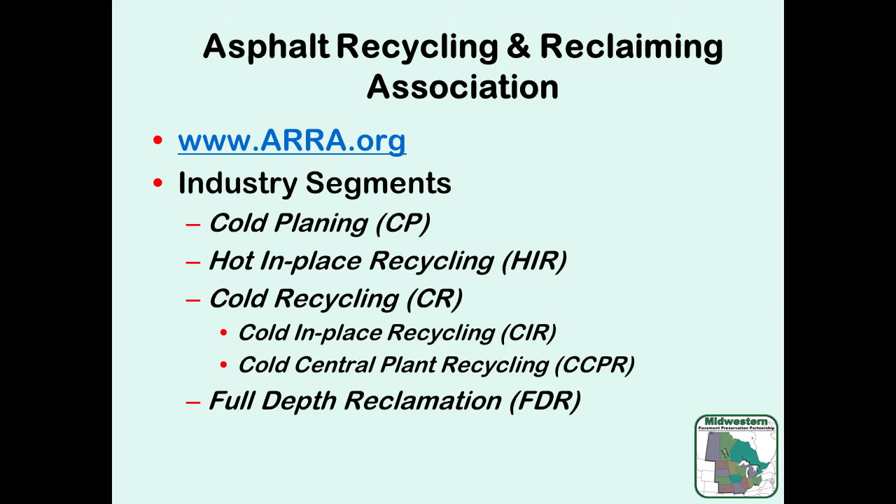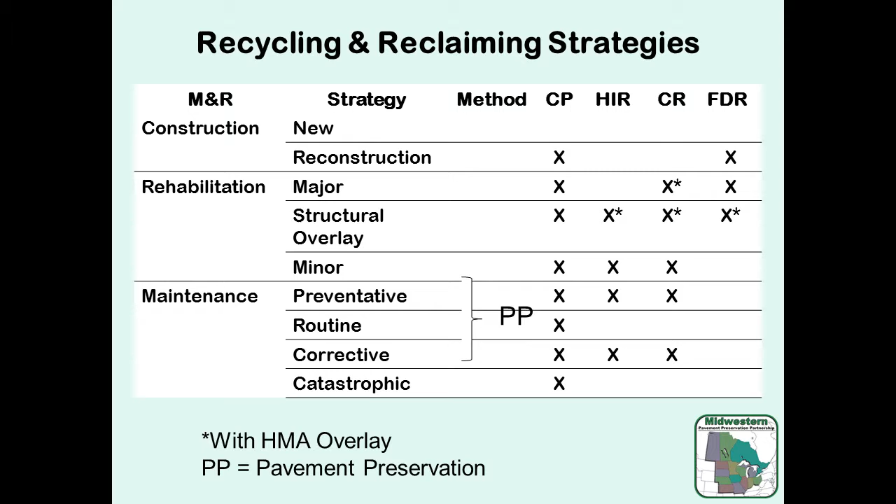So you might be wondering, why are we here? You don't think of these things in pavement preservation. Well, this is a chart we got from the Federal Highway Administration a few years ago. Pavement preservation falls into the maintenance categories of preventive, routine, and corrective. According to the feds, hot in-place recycling and cold recycling fall under preventive and corrective maintenance, so you can use your pavement preservation funds for these activities. But we can also add some structural overlays, make these things significantly stronger, and get into the structural overlay and major rehab. And then FDR obviously does not fall into pavement preservation.

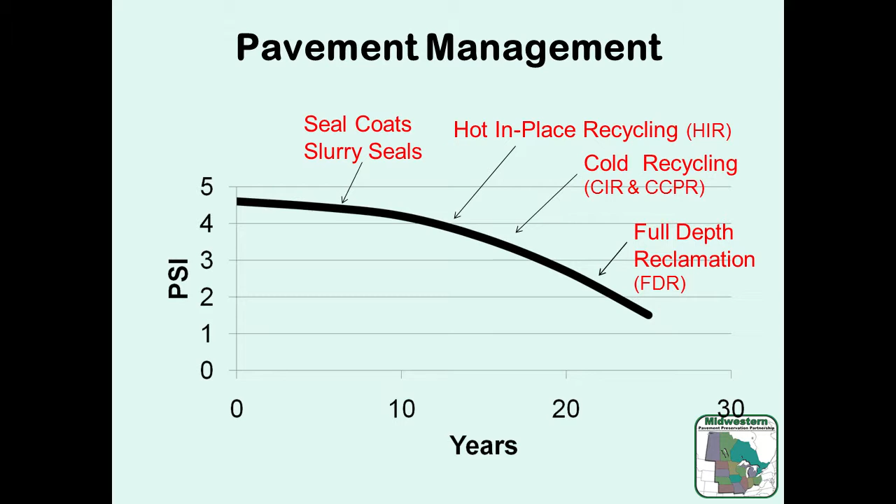So one of the things I got asked to talk about was curing. If we're talking about curing, I made the assumption that we're talking about cold in-place recycling. We usually don't have issues with curing with hot in-place recycling. When I'm working with cold in-place recycling, I have two different recycling agents I can use: foam or expanded asphalt, or emulsified asphalts. And really curing, to simplify it, is getting the water completely out of the system. It's a little more complex than that, but that's a start.

So how does this water get in there? Well, you have to put water on your cutting teeth, and typically that's anywhere from 2 to 2.5% moisture. There are some new cutting tools out there that can knock that water down to 0.5 to 1%, but they're not widely used yet. So it's the same for both. It takes a little bit of water to foam the asphalt, but that's a very small amount, not really all that significant. But there is water in the emulsified asphalt. It might be 1% by weight of the RAP from the water in the emulsion.

With foam, you do usually end up adding a little bit of water for compaction. In fact, a lot of times you run a modified Proctor to figure out the optimum content and make sure you have enough water in there for compaction. For an emulsified asphalt, we might add a little extra water to help disperse the emulsion, but we're not going to add water for compaction because usually we have plenty of water in there. So then there's also water in the pavement.

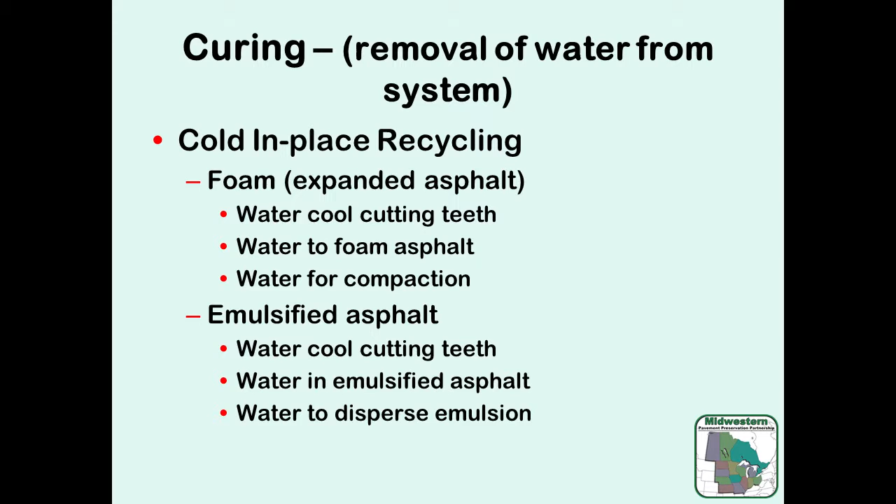With foamed asphalt, I'm sure you're all familiar with this, so I'll go through it rather quickly. We add a small amount of water to hot asphalt, the water evaporates, turns to a gas, and results in a lot of small droplets of asphalt that get dispersed throughout the mix. It's a binding technology, not a coating technology. A foamed asphalt project is going to gain strength fairly quickly because as the asphalt droplets cool, their viscosity goes way up. So curing issues with foam you don't really run into that often.

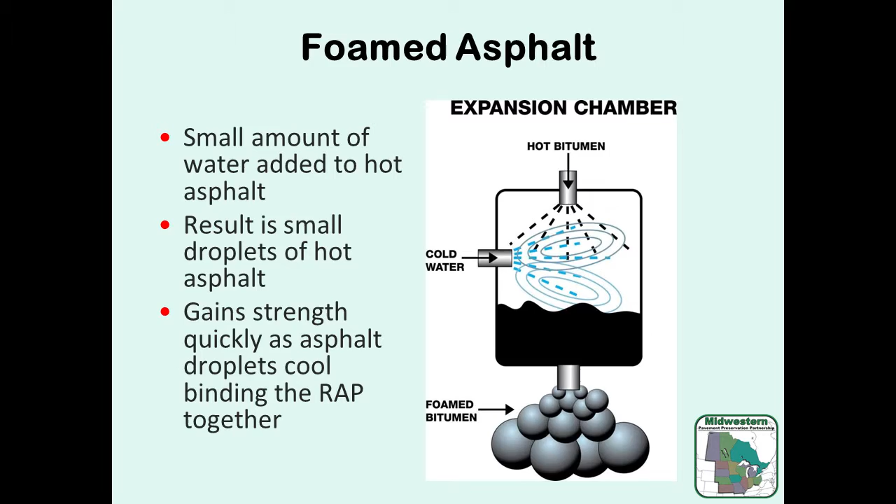But one of the keys with foam is you got to make sure that asphalt foams, because if it doesn't foam correctly, you're going to develop stringers or globules of asphalt in your mix, and instead of binding it together, you just put a lubricant in there. So it is very important in your quality control when you're doing this stuff that you check the half-life and expansion ratio in the field. Every time they bring a load out, there should be a test nozzle on there.

Check it. Having the asphalt at the right temperature is a real key to getting proper foaming. So it's almost always got to be above about 320 degrees Fahrenheit, but it's got to stay below 375. Okay? And again, if you're not familiar, the expansion ratio is the volume of the foamed asphalt to the residual unfoamed asphalt. We really like to see a minimum of 8 times that expansion to get good dispersion and binding.

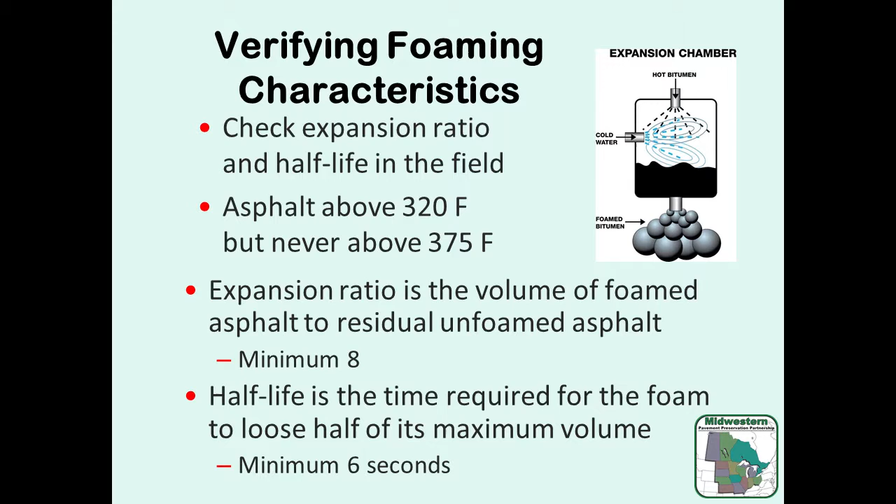Half-life, how long does it take to lose half the volume? We need about a minimum of 6 seconds. So if you drop below that, you're liable to have trouble with globules and stringers and end up with a lubricant in there. But again, when the asphalt droplets cool, they've stuck the stuff together, so curing is not that big of an issue.

So we're going to move on to emulsions, and that's really the issue. I get real nervous talking about emulsions and emulsion chemistry, but a typical emulsion might have anywhere from 40 to 70% asphalt. They might put a little bit of polymer in there. Depending on the type, you could have up to 10% solvents. For cold-in-place recycling, cold central plant, we really recommend you stay away from the solvent-based emulsions. We like the solventless ones, although there are a few people that are still using them.

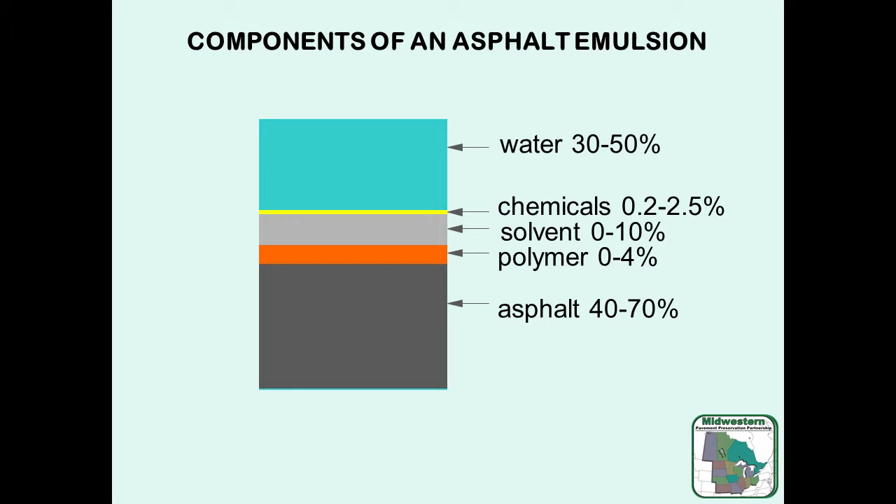The chemical package in there could be anywhere from 0.2 to 2.5%. Water anywhere from 30 to 50. One of the most common asphalts we'll use is basically a CSS-1 or CSS-1H. And you'll see about 60 to 65% asphalt, rest water, and a little bit of other, no solvent.

So it's kind of funny when we talk about curing, are you talking about breaking, or are you talking about setting, or are you talking about curing? Okay, so we want my asphalt emulsion to break, okay? And then it's going to start curing. So there's several different mechanisms that will take place. So the emulsions have a charge on them. That keeps them dispersed, they have the same charge on them.

The destruction of that charge by neutralization of an acid for cationic emulsions is one of the components. You've probably heard if you add lime or cement, it's going to break quicker on you. Why? You're putting a base in there. So you've neutralized that acid, so that'll speed up the break.

Also, you have a charge on that asphalt droplet, you have a charge on your aggregate or RAP. It's going to pull it to the surface, and that's going to help it to break. And then finally, the curing is the evaporation of water. You got to get that water squeezed out of there. So 3 different mechanisms.

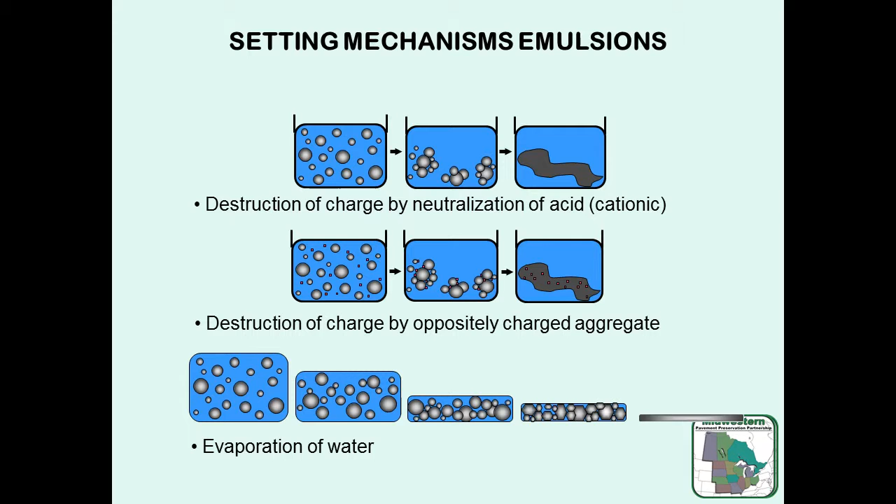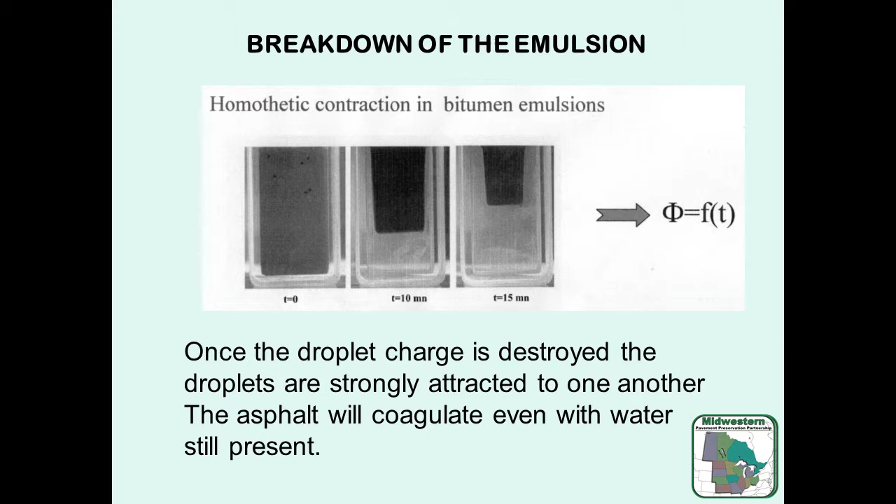So that's actually a picture of a fully dispersed emulsion on the far left. And after 15 minutes, you can see where it's moved together and attracted itself to each other and pushed the water out. So what affects this stuff? There are some things that we can control. There's some things we can't control when it comes to how fast things are going to cure.

The aggregate reactivity, or the RAP in this case, has a big impact. The surface area, unfortunately, with cold-in-place recycling, the surface area is small. Surface charge has an impact. Surface chemistry. But you can see in there, you can add filler chemistry. You can put in a little cement or lime, and with a cationic emulsion, you can speed up that break and cure and really increase your early strength.

The reactivity of the emulsion itself has an impact on this, and so this is where we start seeing the engineered emulsions. Your suppliers will engineer their emulsions, change the emulsifier chemistry or the concentration to get a controlled break. The one we have only a little bit of control over is temperature, humidity, and wind speed, because that's how the water is going to evaporate and get out of the system. Okay?

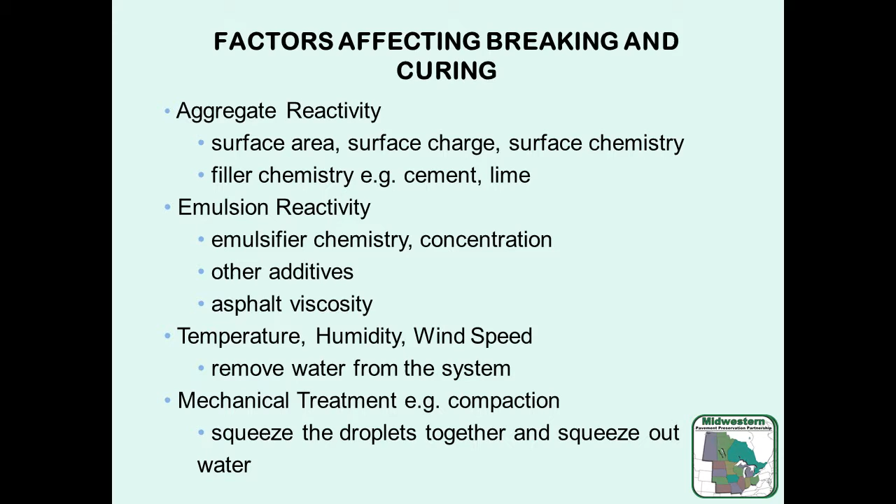So if you try to work with an emulsion on a cold, rainy, foggy day on a really wet pavement, it's not going to want to break and cure very quickly. And then compaction. The compaction will also mechanically squeeze water out from between those droplets and help it coat and start gaining strength. Now, as far as curing, it does take a while to develop full strength. It can take months to develop full strength, but as long as you get it to break when you want it to, it'll gain strength fairly rapidly.

We did a survey for TERRA. You can get on TERRA's website and find this. Roger's gone, but we did this for Roger a few months ago. We sent out a questionnaire, and one of the questions was about the time/criteria when you place an overlay, an issue or concern with CIR and FDR. We had about 45 agencies respond; about 60% said yes, about 40% no.

The one that surprised me: are you satisfied with your criteria? 75% said yes, 25% said no. What was the most common criteria? Moisture content. Measure the moisture content, okay?

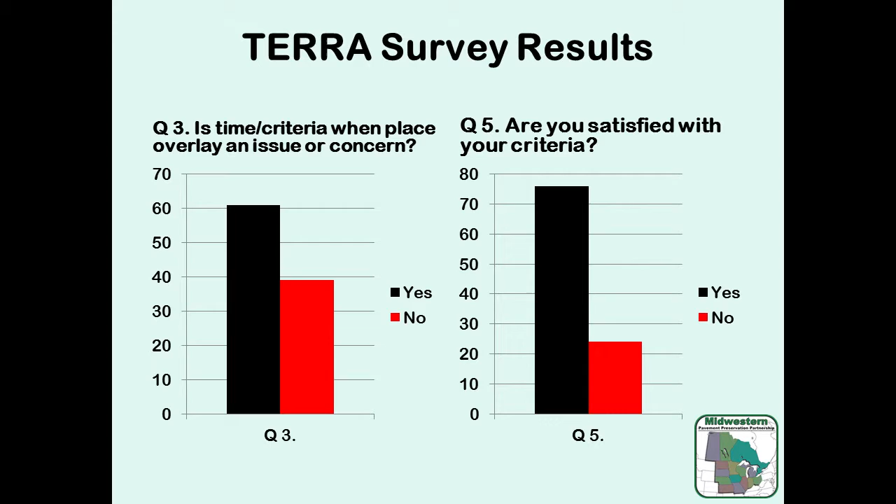So, how do we measure curing? Well, right now, ARRA is recommending a couple of things. We do want this to cure a minimum of 3 days. Whether it's foam or emulsion, we like to get some traffic on there that helps fully break the emulsion and get it really nice and cured. Allows you to gain some initial strength. With the traffic running over it, you get some extra densification.

We also want the moisture content below 3%. Okay, but if your pavement was wet to begin with, or it rained on your pavement, you've added more water to the system. You're not measuring the water in the emulsion, you're measuring the total water, so we have some issues with that. So if the moisture content doesn't fall below 3%, we don't really want that thing left open more than about 10 days.

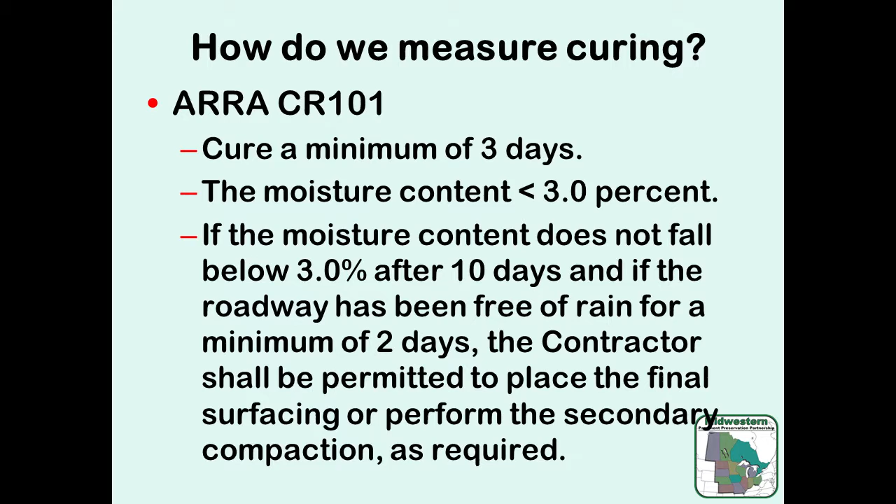And if the roadway's been free of rain for a minimum of 2 days, you're probably okay to overlay it, okay? Again, if the road's not stable, don't overlay it. Okay, but it really probably should be if you did the proper design and selection of materials.

Problem is, moisture content's not always the best method. We would like to see a new method out there. There are some people looking at some things, and ARRA is more than willing to help people evaluate these things. Because the problem is, it's not necessarily total moisture that affects breaking and curing. It's getting that moisture out of the emulsion, and you can only measure total moisture.

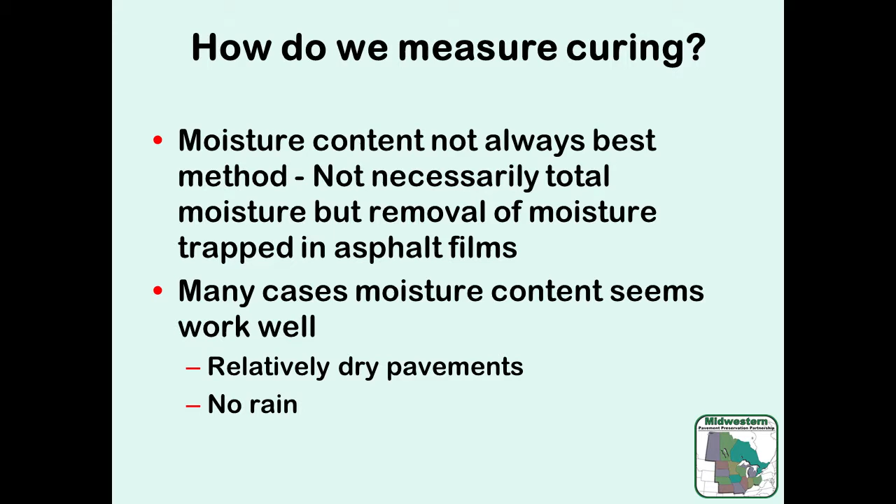But in a lot of cases, measuring moisture content does seem to work well. If you do this in the summertime, your pavements are relatively dry, you don't get rain on it, it actually works quite well. So, what to do? Well, don't cold recycle in cold, damp weather. We recommend a minimum of 40 degrees or 50 degrees Fahrenheit, depending upon where you are. Don't do this if heavy rain is imminent. Be careful with pavements with high in situ moisture contents. That may not be your best

project to select, okay? Other thing I tell people when we hear about the emulsion's not breaking and whatnot: there is a raveling test out there, and there's some issues with the raveling test, but run the raveling test. Run it at the right temperature, okay? And the right humidity, and it will give you a pretty good indication that under certain conditions your emulsion will break, okay? And we have some criteria on that we'll get to.

If you're really concerned about getting a good break and early curing strength, consider the use of an additive, either cement or lime. We typically say no more than 1% cement or 1.5% lime. We want to keep that ratio of residual asphalt to cement greater than 3 to 1, because you don't want to turn a flexible system into a rigid system. It'll crack up on you.

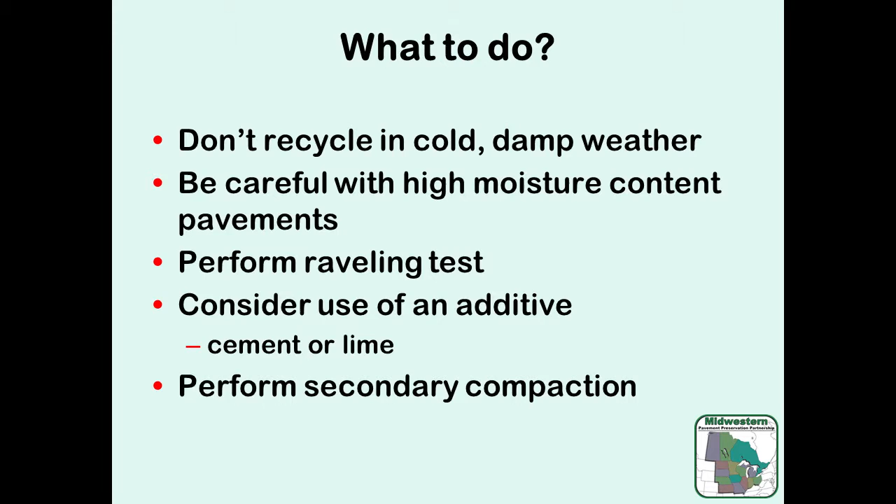One of the other things we like to see people do, if it's been curing and the mix is still a little bit soft, before you put that overlay, come back and do secondary compaction. You can sometimes pick up 2 to 3 pounds of additional density doing that. That's not generally done with foam, just with emulsions. Okay, I've told you all I know about curing.

So, real quick, one of the most common things we hear about these in-place recycling techniques, why we don't do it, is a lack of information on it. So, talk about some of the available resources that are out there real quick.

How am I doing on time? Good, okay.

We put out the Basic Asphalt Recycling Manual in 2001, and it was the book on in-place recycling. You see the original one. It's been translated into Chinese. I actually got a copy of that. It's been translated into Spanish as well. So it's been all over the world. However, it was getting a little dated. There's been a lot of advancements in materials, construction equipment, etc.

So a couple of years ago, we started work on revising the document. And at first, they thought it would be just a few slight changes. We actually rewrote the entire document. So it's a completely new one. It's the Basic Asphalt Recycling Manual, or the BARM. It came out late spring, early summer.

Again, completely rewritten. It's divided into 6 parts. We have an introduction to recycling. We talk about cold planing, hot in place, cold recycling, full depth reclamation, and an appendix. And on each one of our cold planing, hot in place, etc., we have basically 4 chapters: one on pre-construction activities or project selection, mix design, construction, and quality assurance, sampling, and testing.

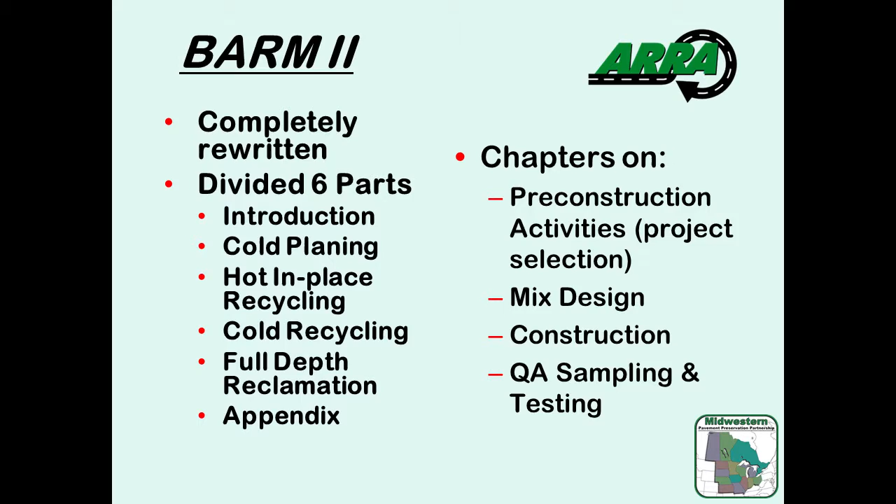All right, but you know, we want that document. I wrote the first one, I wrote the second one, I'm not writing a third one. So I want this thing to stay around for a long time. So we decided to come up with some best practice guidelines, because things will change. There's some research out there. We can keep this current. So ARRA has on their webpage a series of best practice guidelines for each one of these disciplines. And our 100 series is recommended construction guidelines or best practices for construction.

Our 200 series is recommended mix design guidelines. Our 300 series is recommended quality control. Some of these are developed, some aren't quite ready. The 400 series is project selection. We're starting work on that one. That's not out there yet.

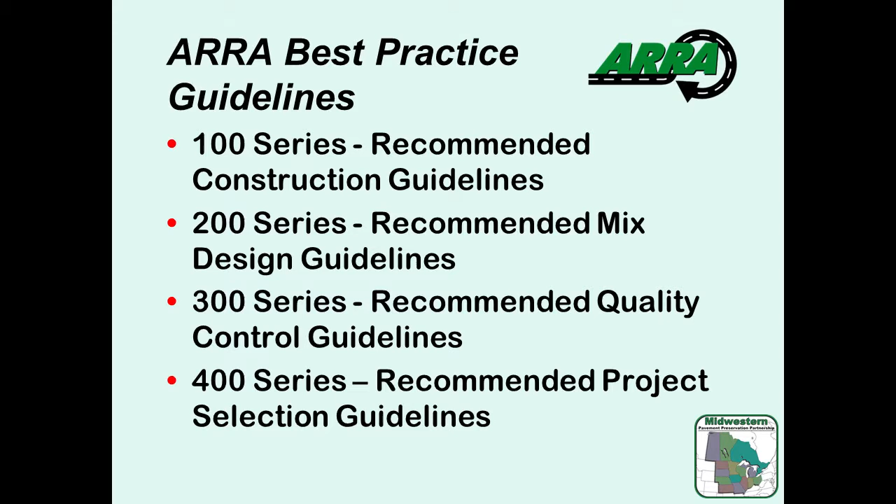Where can you find these? Well, you can go to our webpage, and if you click on the tab that says resources and go all the way down, there's a tab that says guidelines, and you click on that and you can download these in PDF versions. If you don't want to do that, shoot me an email and I'll send them to you. If you want to buy the BARM, you can go under shop and you can find it there, and we'll sell you one there as well.

All right, what else is available? We have either put together or are in the process of putting together 3 web-based inspector training courses for cold in place, hot in place, and FDR. Cold in place has been out for about a year. You can find it on the TCCC webpage or the NHI webpage.

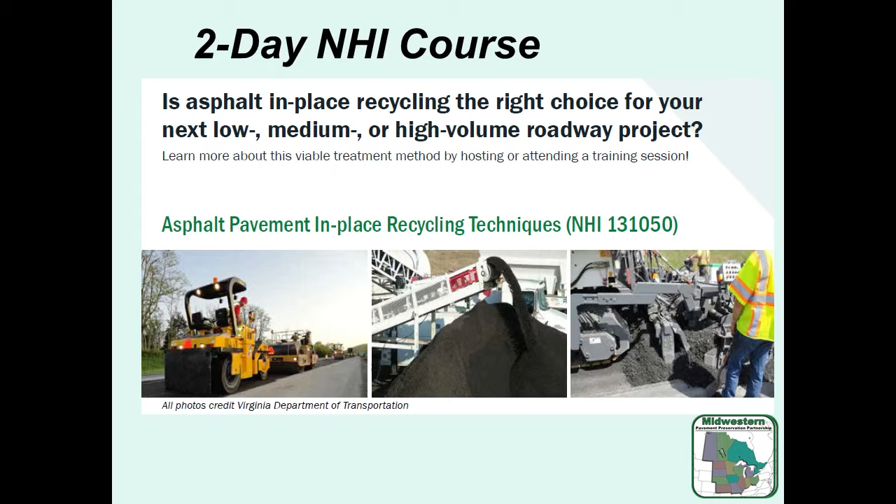Another thing that's out there, the NHI has a 2-day course on asphalt pavement in-place recycling techniques. It's NHI 131-050. Any state, federal, local agency, contractor, industry group can agree to host this class. There are 2 web-based introductory modules, and it's a 2-day instructor-led class. And it's geared for people that are selecting and designing recycling projects, writing specifications, and inspections. Very good course.

But along with that, earlier this spring, Virginia Tech had me come out and help them put on a 1-day seminar for Wisconsin DOT. We thought this went over really well, and we are in the process of developing some concentrated 1-day courses. We have one on cold planing that NCPP is working on, and ARRA will put you together a hot in place, cold recycling, or full depth reclamation class. We'll come to you if your agency is interested in full depth reclamation or cold in place. It's hard to travel. We'll come up and put on a 1-day class for you.

Typically we cover project selection, mix design, thickness design, construction, and quality control. For the one we did in Wisconsin, we actually did cold and full depth for them. So we can kind of customize these to your liking.

So finally, to wrap this up. If you would like to get a copy of the BARM, the easiest way to get one is to see an ARRA member. And if you're an agency, they will probably get you one. You can purchase one on the web.